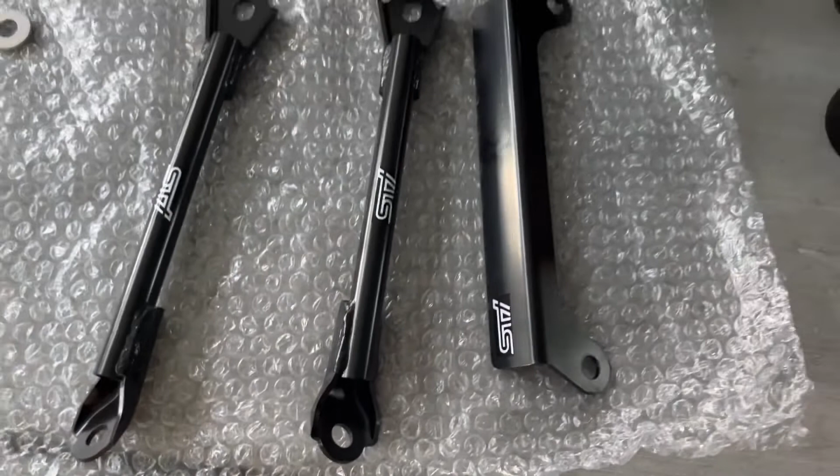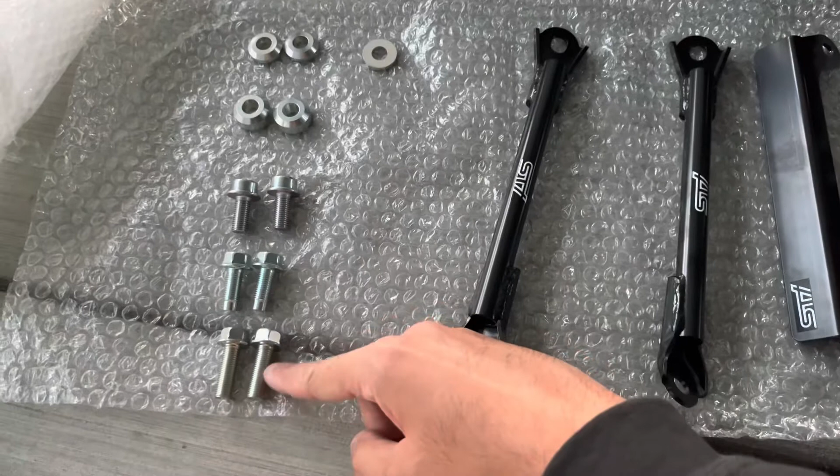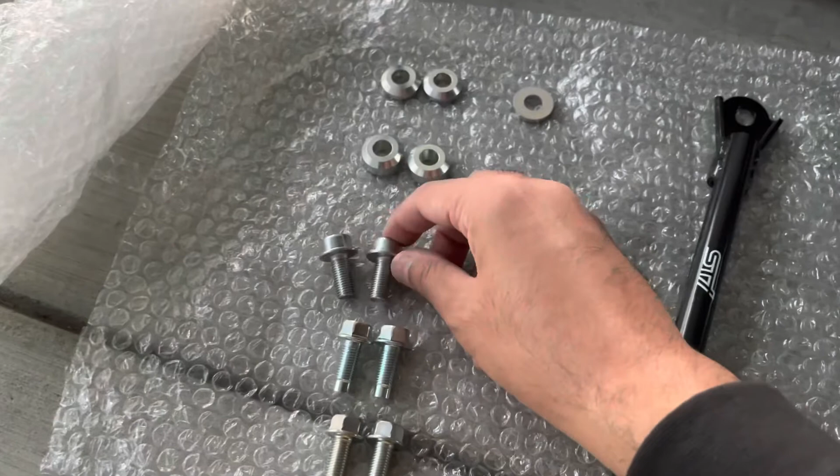Here are the things that you get in the box. So here's a bracket - these are the two main pieces. Here we have these longer bolts, and these are some shorter bolts. And then we have these hex bolts along with these spacers. There's two sets - these are thicker ones right here on the bottom, and the ones right here are thinner. And then you get one washer.

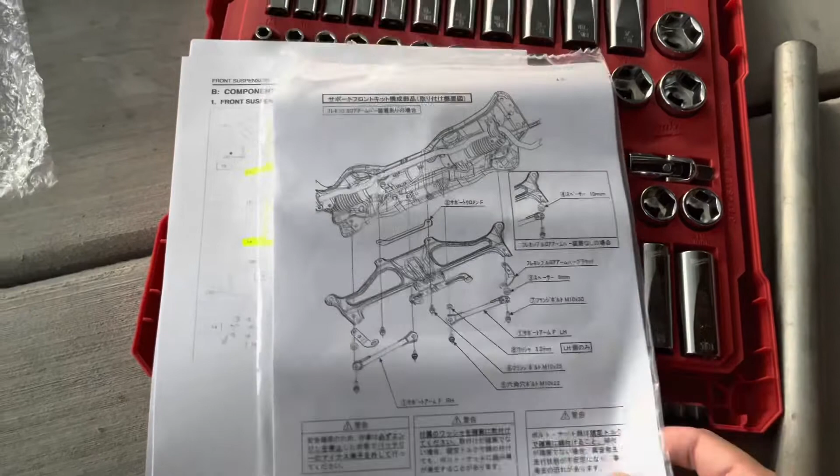Okay, then here are the JDM instructions. This is the only page that I think I'm going to be using, because the other pages I can't read them, and this is the only one with a diagram and pictures.

I'm going to be using this S209 front suspension service manual - it's like a manual for the S209. I highlighted all the pieces for the front support kit.

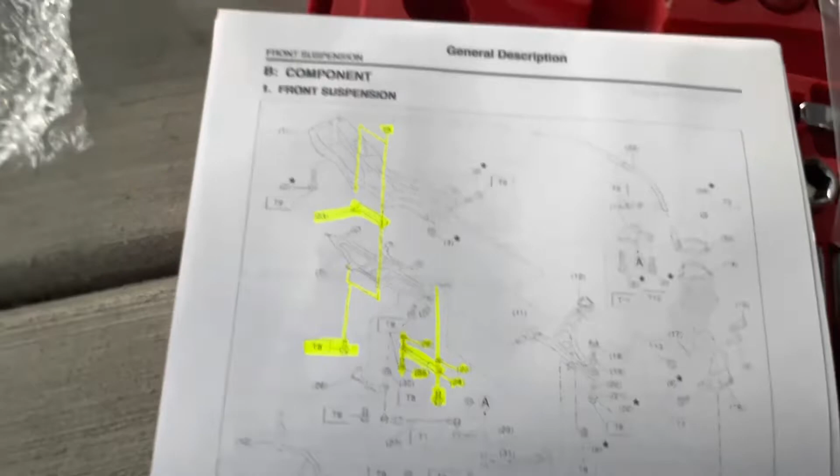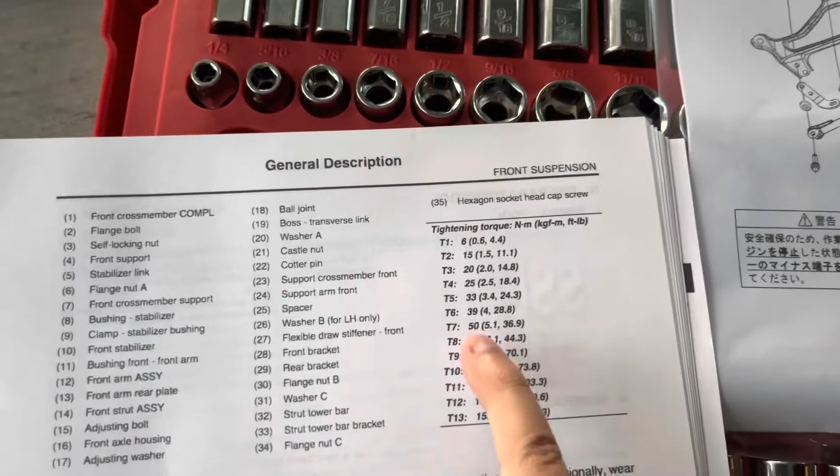The torque specs for everything seem to say T8 for everything, which comes out to being right here, 60 Newton meters. So I'm going to be going by this - hopefully it works out.

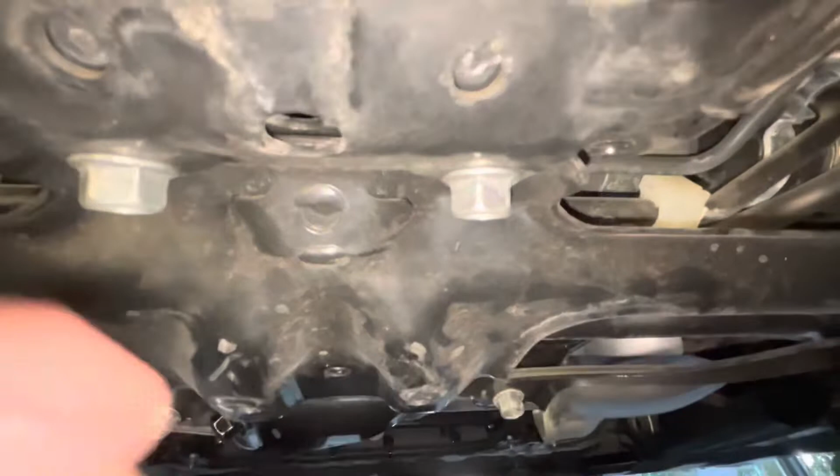And yeah, I'll get back to you guys once I start taking things apart, see how this goes. So here we are underneath the car. I know it's kind of hard to see, but it's really tight under here. If you have the front flexible draw stiffeners, that's where the front bracket connects, okay?

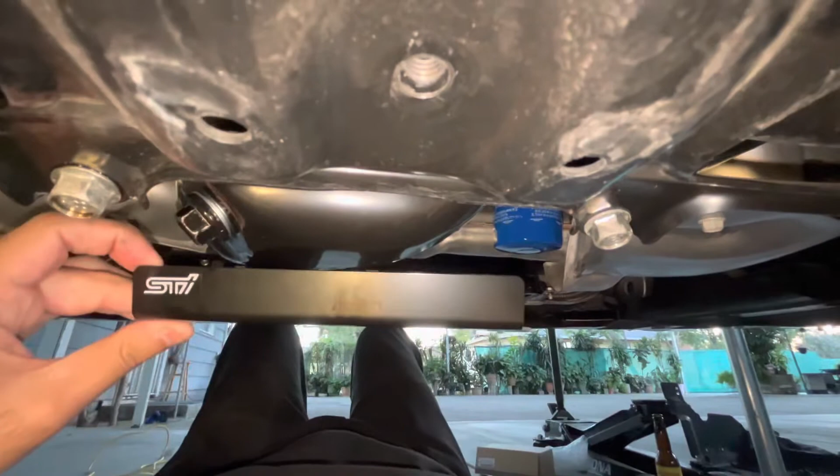So I'm going to be installing this piece first. If we go a little bit forward from these two bolts, we see these two right here - okay, there's the oil pan, by the way, for reference, and the filter which I just changed earlier today. So it looks like we're going to be taking these two bolts off, and then this guy is going to be going above this piece right here and in between.

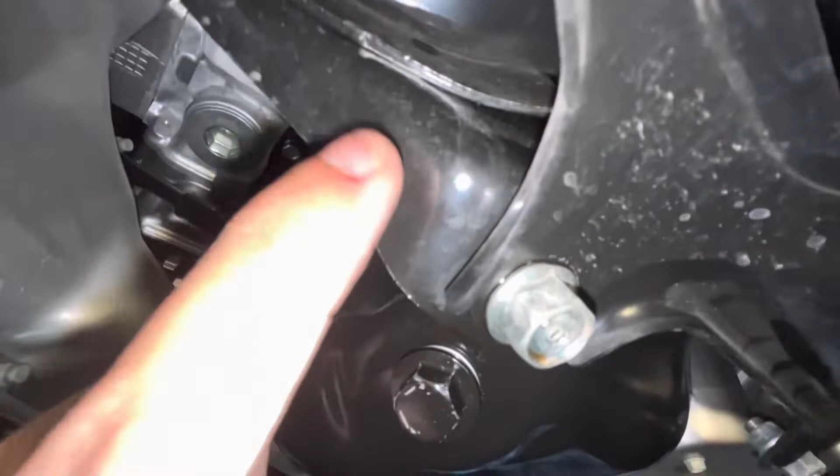So again, this piece right here is going to go in between this piece right here and then this piece - there's two pieces in case you can't see. And this, if I'm correct, this little STI logo is going to be showing through here. So let me get that done - I'll be back.

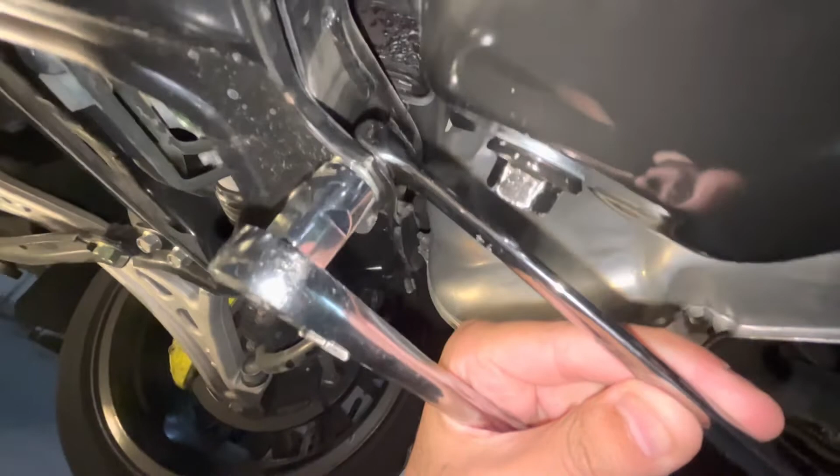Quick check-in guys, this is how I'm removing the bolts. I got my 14 millimeter ratchet under, and there's actually a nut up there, so I got a 14 millimeter wrench to hold it steady. Be back.

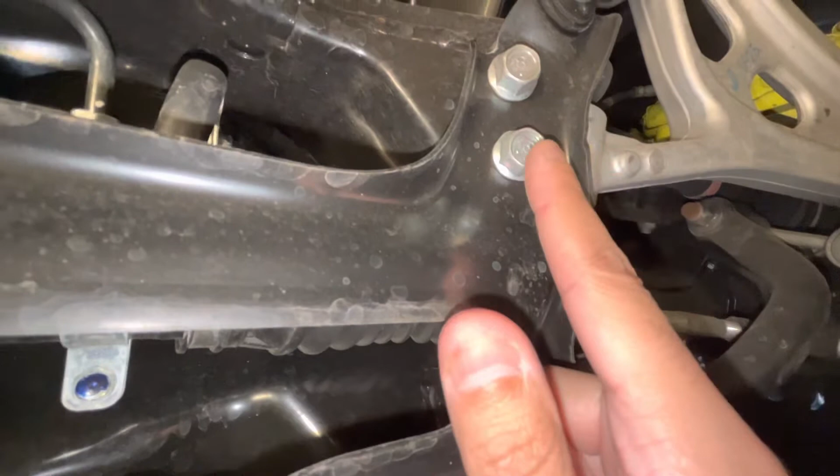All right guys, so I have the two bolts removed, right here and right here, but I have to separate this so that the piece can go in between right there, and it's pretty sturdy so I can't move it. So I think I'm going to have to remove this bolt and this bolt, and maybe that bolt, and then maybe these two bolts too. And then the same thing on this side - this bolt and this bolt. And hopefully that'll let me wiggle it so that I can get the bracket in there.

So I'm going to start from this one and then work my way back on both sides until it can wiggle and I have enough space to put the piece in. I'll be back. Okay guys, I'm back.

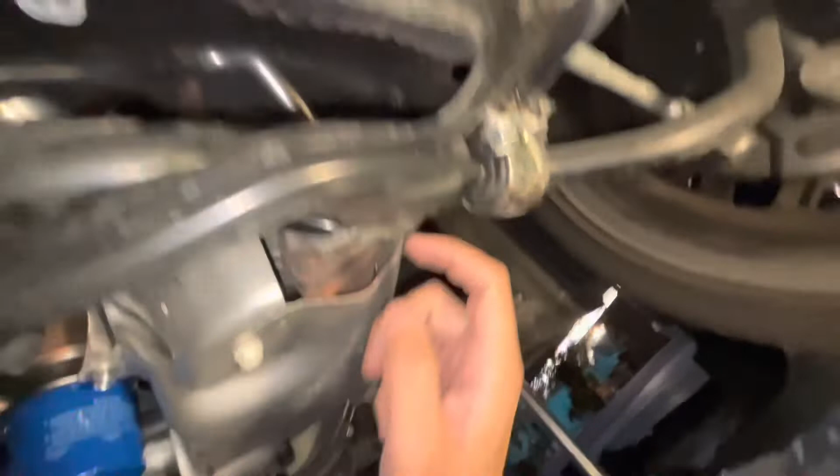So again, we removed those 2 bolts, and then here I've loosened this bolt, and then these 2 bolts - if you can see, they're a little bit out. And it looks like I have enough. Can you guys see that? Let me see, I can open this gap up a little bit. Let me see - see? So I'm going to slide the piece in.

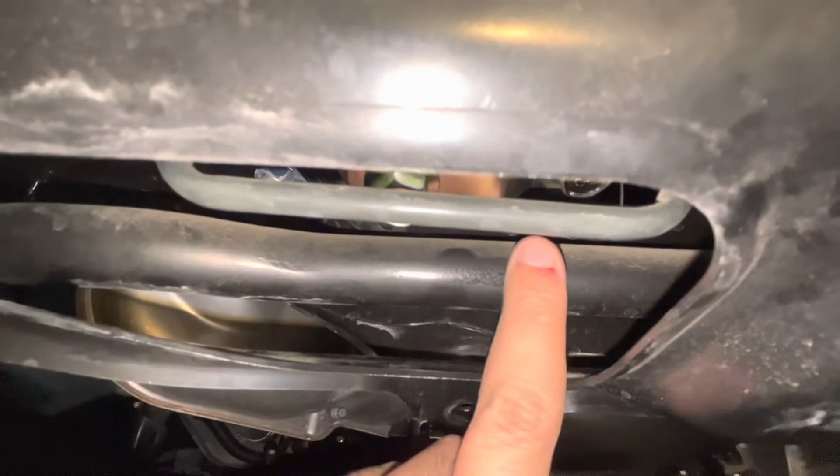As I'm back again, I actually had to loosen these 2 bolts right here because I didn't have enough play. But now, you guys see, I have enough play to move the whole thing. And the reason I had to loosen these 2 bolts is because the piece - I thought it was going to go in front of this bar, but it actually goes behind it. So yeah, I'll get back to you guys right now with it in place.

Okay guys, so here we are - so this is how you're going to slide it in, just right here. I already have it started, and you're just going to slide it in.

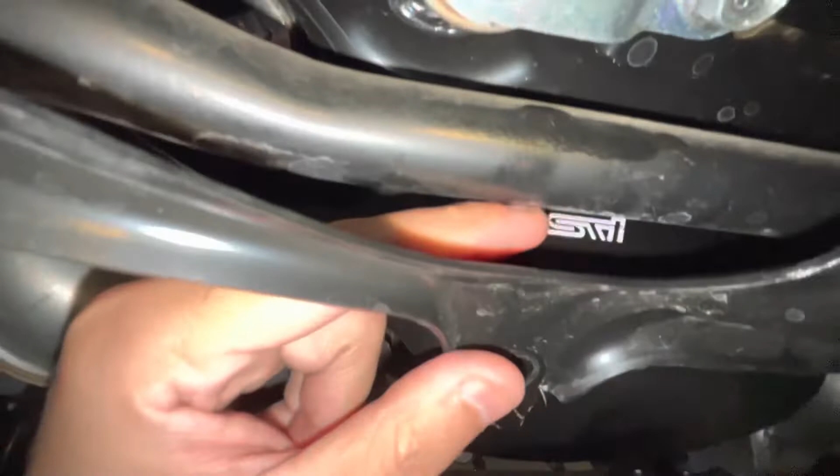Right there, and the bolt holes line up on this side too. So just put it in through this side, or the other side. Slide it in, and then I'm gonna tighten everything back up, and then hopefully I can install the other 2 pieces.

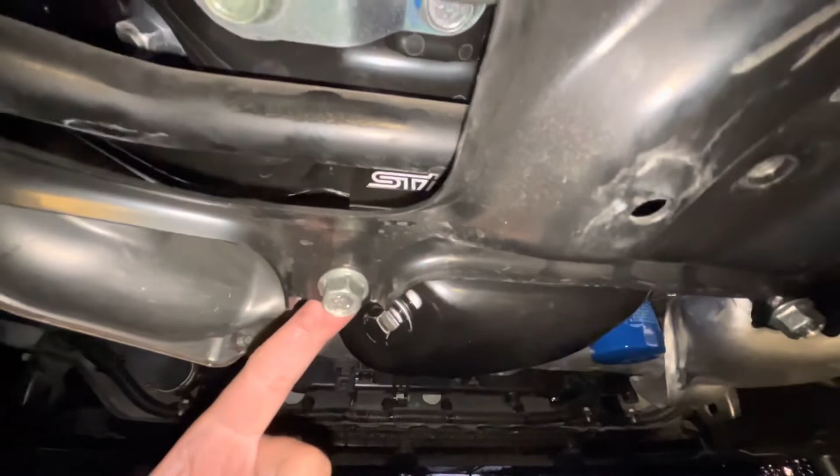Guys, I'm back, sorry for the noise outside. It's in place, I just need to tighten all the bolts, 60 Newton meters unless I say otherwise. I'm gonna check the instructions real quick, and if I don't say otherwise, that means I tighten them all to 60 Newton meters.

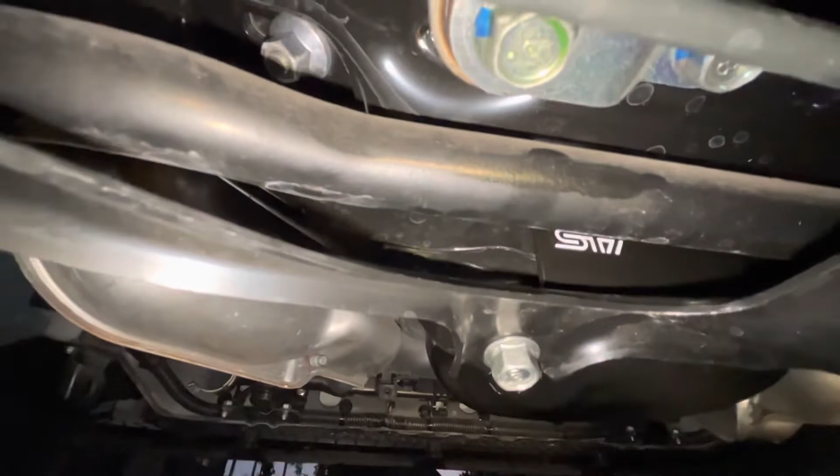There's the piece. Make sure you can stick your fingers in here and then push it that way, so there's as much space as possible between this piece and the actual piece. That's what I did, so it's not rubbing up against anything. So once again, I'm gonna tighten everything back up.

Oh, and one more thing. These 2 bolts, those are the only ones that had nuts on the other side behind them. This one, no nut. This one, no nut. This one, no nut. And these, no nuts.

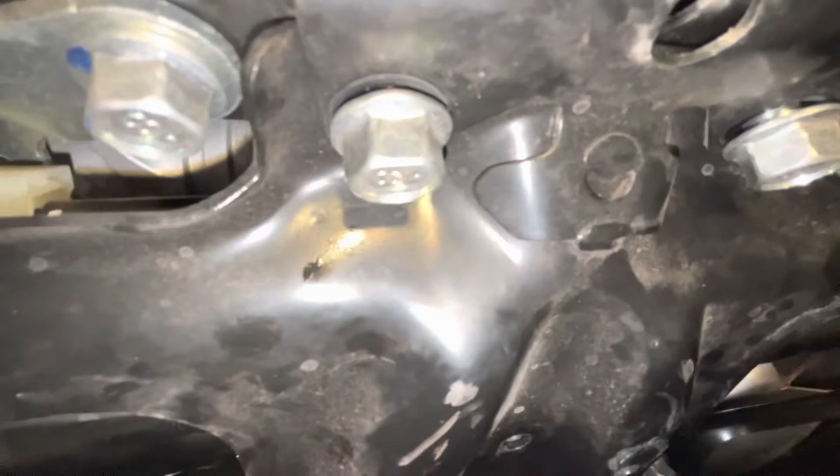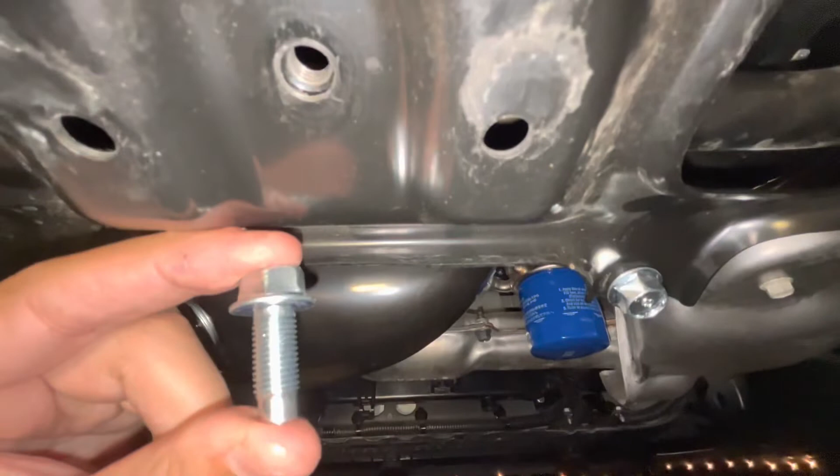So these 2 bolts, you're not supposed to use the old ones. This is the old one. You're supposed to use, here we go, the new one, the new ones that come in the set. Out of the non-hex bolts that come with the front support kit, these are the shorter ones. So there's a long one, and there's a short one.

And then there's the hex bolts. So again, we're using the short one. These are 25 millimeters, by the way, in length. Sorry, and then use a 14 millimeter socket. So I'm gonna tighten them up, and then I'll get back to you guys.

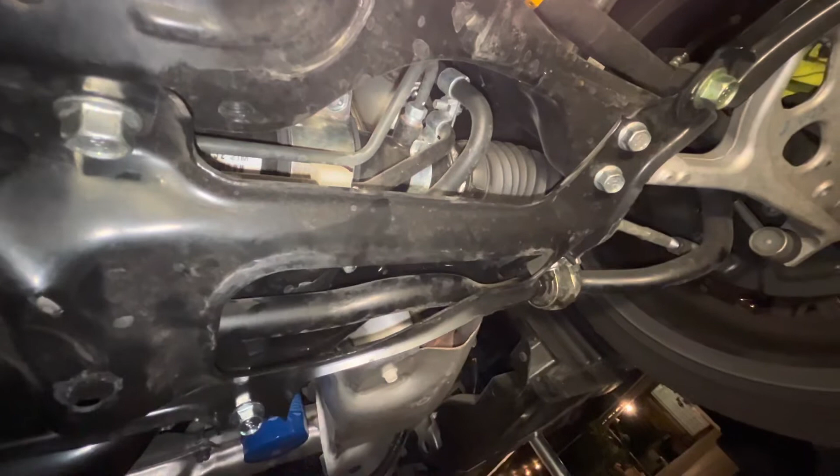Guys, I'm sort of confused. I do know though that we need to take this bolt off, and then this bolt off, and on the other side the same. It's this bolt and then that bolt. I'm not sure about the spacers though. That's what I'm confused about.

Because in the JDM instructions, it says you only use the washer on the left-hand side, which would be this side. You would use it right here. I guess because you don't need the spacer, since you have this thing on this side only. Over here, it's just the bolt hole. So I guess you just need the washer.

Okay, but in the pictures for the JDM instructions, this piece right here is on the right-hand side. So I don't know if that's like a region thing, because overseas they drive on the right-hand side, and maybe that's why that's on that side, but I'll figure it out and see how it fits, okay?

I'll be back. All right, and we're back again. Everything is installed, guys. So right here, you use the only remaining bolts that you have, remember.

Right here, we use the short bolts. Right here, we use the long bolts. And then right here, we use the hex bolts on the inside. Outside, long bolts. So the other side, hex bolt, long bolt.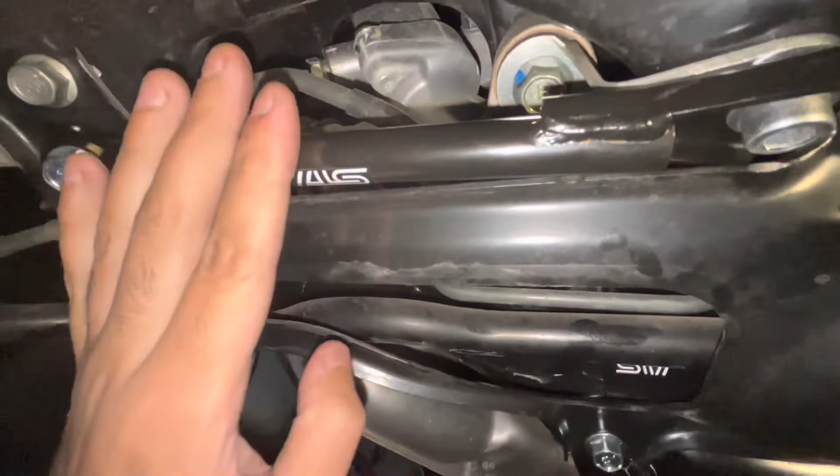And then here's the part that's a bit tricky. On the left hand side, well, first of all, you use the fat spacers on the outside on both sides. See that? Right there, fat spacers. On the inside, for the right hand side, you use the skinny spacer. And then on this side, because this bracket thing is right here, you just use the washer.

And one thing that I'm still confused about, maybe I'm overthinking it, you have one skinny spacer left, which would go right here if that bracket wasn't there. Maybe that can be removed. I don't know, I actually don't know what that is.

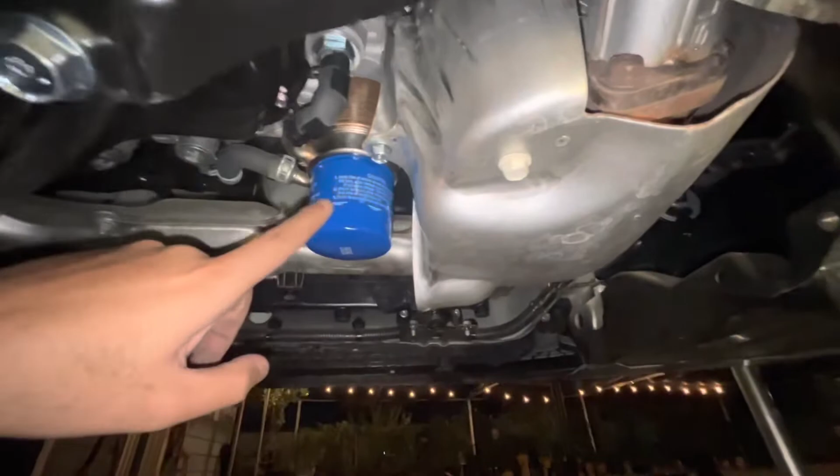What is this thing right here? There's the oil filter. What's this thing right here? All this, what is this? There's this heat shield, what's under here? Because it's kind of rusted already. My car's not that old at all. So what is that?

But yeah, sidetracked. Here we are, everything's tightened down, 60 Newton meters.

Cool. Now the only thing I have left is the front flexible draw stiffeners, which attach right here, from here to here, I believe. So...